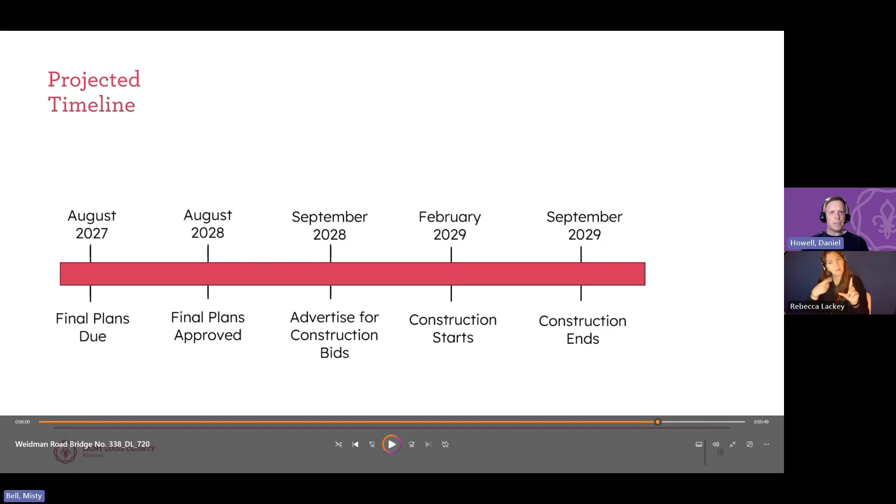We have another comment about Weidman Road being beat to death and turning cars into rattle traps - what is the plan for Weidman Road? I'm sorry if I said Carman earlier, I meant Weidman Road.

I know the bridge reconstruction will address the immediate limits outside of the stream itself. We do take readings countywide for road condition in order to program the roads that are in the worst shape moving forward, so that's something we watch and rate on an annual basis. If it becomes an issue through the detour route, we have local staff in our specific districts who could do some immediate patching, but that's something we watch as well. We certainly account for resurfacing projects as well as bridge replacements.

That road, being an arterial, gets inspected each year. I'm not sure we've done an inspection yet in 2026, but we will keep an eye out for it. We do have an annual program where we apply for funding for project repairs or roadway resurfacing projects, and if it turns out to be a candidate, we'll certainly get it on the list.

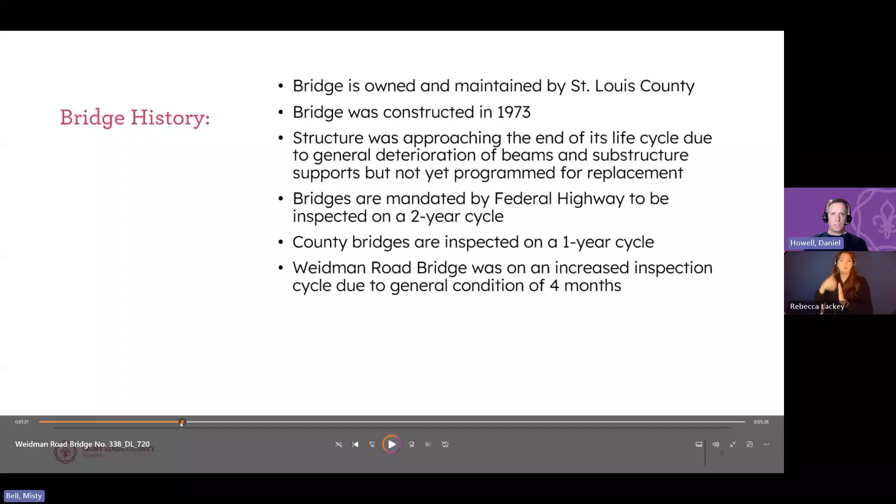How did the condition become critical in such a short time frame? Well, I think, Dan, you mentioned that we inspect bridges typically once a year, but this one started to have issues, didn't it? Yeah, there were some other items, not shown in the couple photos there, that had increased it from the one year to a shorter time frame, but it wasn't yet critical.

It wasn't until we found that critical steel that was exposed in November that required reassessment of the load carrying capacity.

A question about a military-type temporary bridge in parallel to the current bridge — it's such a small span, there has to be a way for a temporary crossing. The issue there would be the right of way and off the stream.

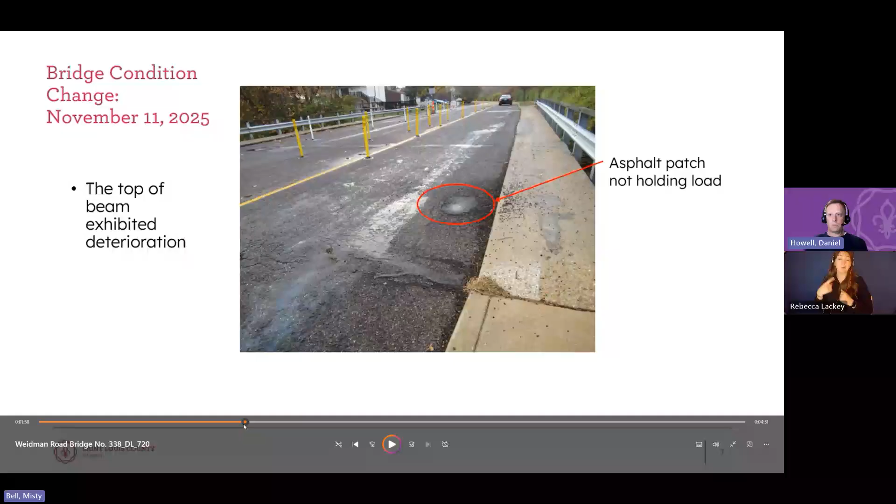If you're either up or downstream, that's somebody else's property. So it would take time to even start that process, and that might take another year and a half, at which point we're almost close to the replacement timeline. Plus, you'd have to pay for the temporary bridge, so that would be added cost to the project.

Next question: if it doesn't take 1.5 years for property rights, is the plan to move up the construction dates? In theory, yeah, we'll try to move as quick as we can through the various phases if there's a way to increase the timeline. We don't want to get anybody's hopes up. We want to try to set realistic expectations — this is our typical timeline for a project of this size. If it happens to be that it gets quicker in one of the phases, sure.

I think everyone on the call and from the county would love to get the bridge replaced sooner than later, so we'll certainly work towards that. Again, no guarantees, but if it's a possibility, that's certainly something we would welcome.

Another question: did this bridge get missed on the 5-year review of bridges? Well, I don't believe so. We inspect our bridges annually.

Do you think this will be a larger project than the bridge? Weidman and the parking lots along it — McDonald's, the vet office — are awful and don't stay repaired long. Is the issue more with Grand Glaize Creek? Is it causing subsidence issues? Does it need to be wider or have more supported banks?

No, in this case, I think it was just the age of the structure, being built in '73. Just based on its condition, it's basically approaching the end of its life, crossing the creek. I don't necessarily think it's an issue with Grand Glaize Creek itself — mainly just the structure itself is in need of replacement.

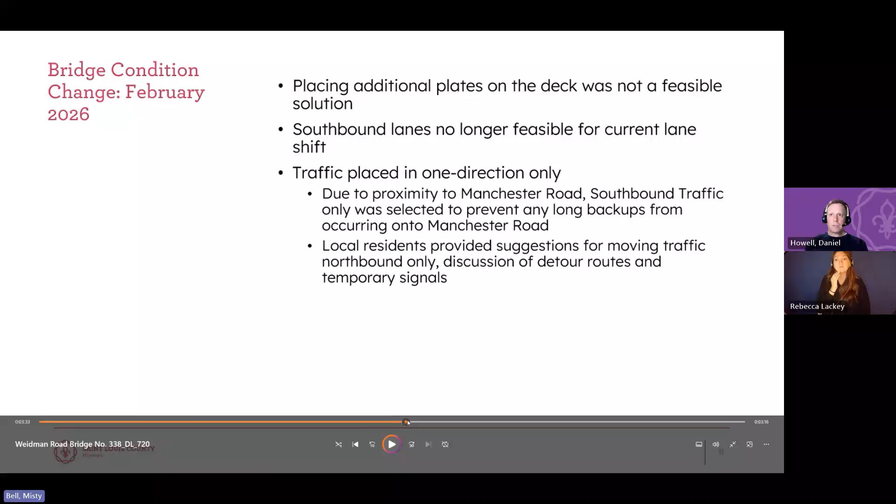As far as extending or expanding the scope of the project, it's really only funded for the bridge work at this point, not an extensive amount of roadway pavement replacement on either side. So for now, it's just the bridge that's funded for construction work.

Next question: while the bridge is closed for replacement, could a signal be added at the Manchester-Dietrich intersection to facilitate traffic to and from Manchester Road? We don't actually own Manchester Road, that would be a MoDOT issue. Chris, from an operations standpoint, there are a lot of obstacles. It would be MoDOT's call whether or not to do it, but there are other challenges like proximity to other signals, the size of Manchester, et cetera, that would make it very unlikely for them to approve or even consider it.

Next question: will the county work with MoDOT and Manchester to assure that temporary traffic flow isn't further hampered during construction? Probably a bit of a moot point, since the bridge will be closed during construction. The traffic flow in the immediate area would be similar to the map shown here, either taking Carman to 141 or to Barrett Station. But we'll work with our agencies in the area to ensure the disruption is as minimal as possible. I know there's going to be a ripple effect once you close a bridge that takes that many cars per day, but we're trying to get it through as quick as we can.

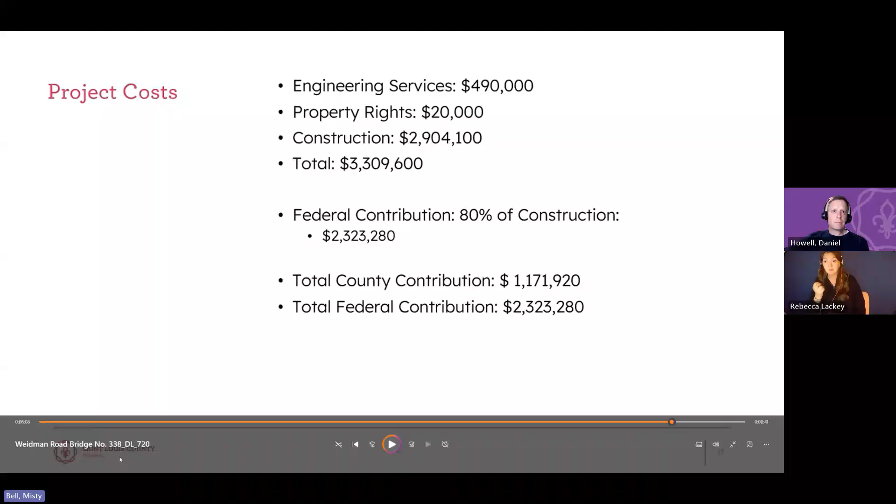Next comment: when Weidman is out, can we ask Manchester Meadows South to let us use their light as a turnaround lane?

Chris, are you familiar with that location? I'm not sure where that's at, not real sure about that one either. But we don't generally use private roads for detours, especially for collector arterial roadways to residential roadways. Without knowing exactly what that is, it's kind of hard to say.

Next question: if the bridge is too unsafe for both lanes to be open, how is it safe for one lane to be open? The bridge is actually wide enough for three lanes. If you've driven through the area, you'll notice it's a pretty big zigzag, Z-shaped motion. So we're taking traffic on the acceptable portions of the span that haven't been affected, as shown in the photos at the start of the presentation.

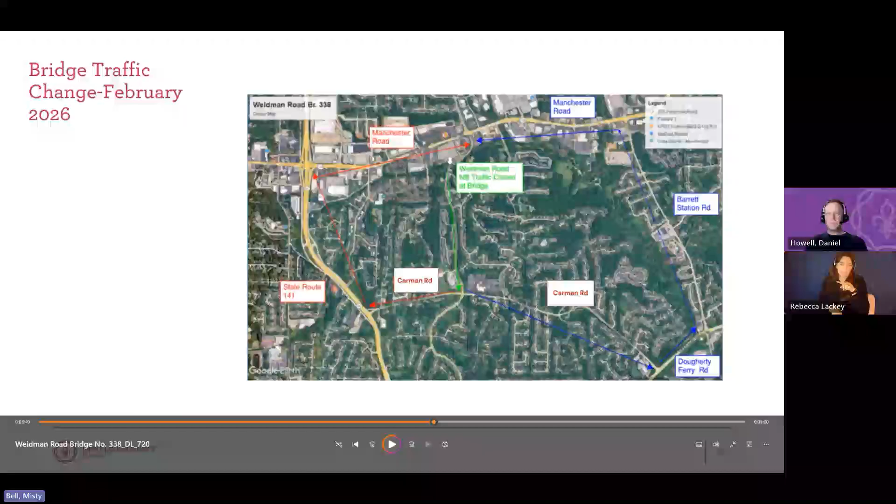Another comment on how quickly the bridge road deck has deteriorated - it's going to have to be repaired virtually monthly. That may be - we're out there patching it on a more frequent basis here.

Another comment - you can turn right onto Manchester from Dietrich and then turn into the DSW parking area, then get the light at the car wash and turn left onto Manchester. It isn't ideal, but safer than trying to cross many lanes of traffic. That's a good point, there are ways around it.

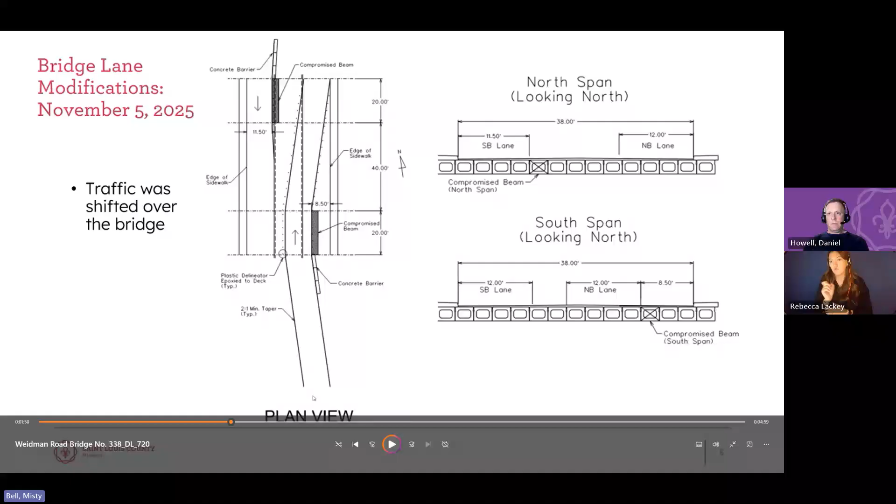Another question - does the county zoning department consider material support prior to approving additional entities such as churches? That's a question for our planning and zoning folks, I suppose. The material support - I guess that's inferring property taxes, which I don't believe is a criteria in planning and zoning, but we can get back to you on that one if you want more information.

Last question - if there was another bridge in the same area that needed major work, would one bridge or another take precedent? Three-plus years is way too long. We kind of take each bridge individually. I don't know that one would take preference over another. From my point of view, it's mainly based on safety. So if there's a safety concern, we're going to program that bridge for replacement. If another one comes up that's similar condition, we'll get that one next. So it's mainly a case by case basis.

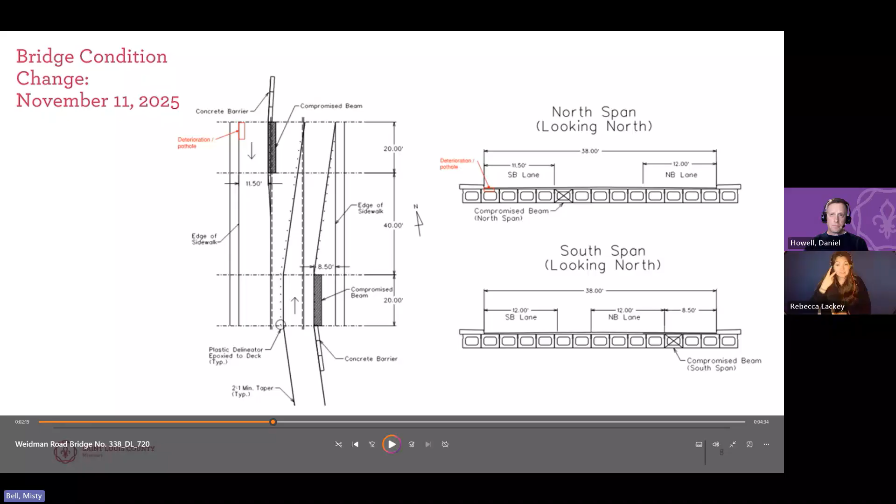Last comment, and I think I'll read this last comment, then Misty, maybe we could watch the slideshow presentation from beginning one more time. It's been a while, and in case others joined us and have not seen it, the last comment is: have we not progressed enough when several beams need work that all the hoopla is to be done and taken? Well, we're working on a design to replace this one. It's a 50-year-old bridge that has reached the end of its time, so not unlike many other bridges.

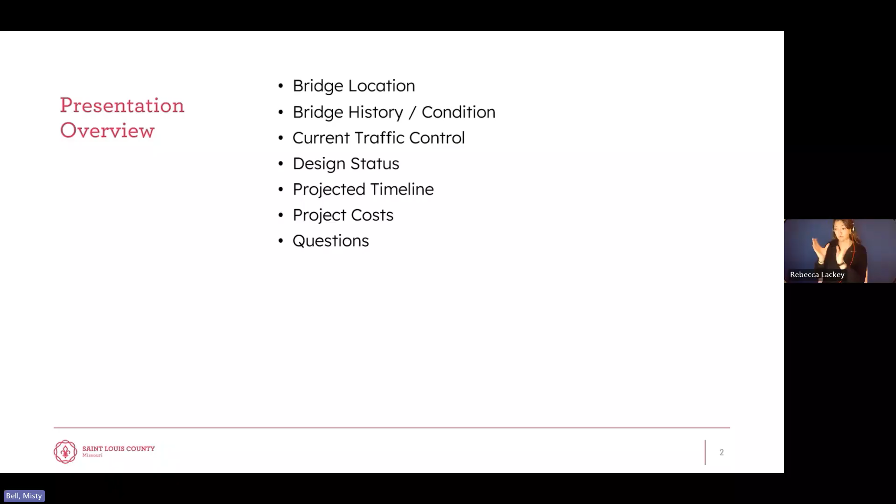Feel free to put those comments and questions in the chat window at any time so we can address them at the end. The Weidman Road Bridge is located in unincorporated St. Louis County, south of Manchester Road between Braeshire Drive and Dietrich Road.

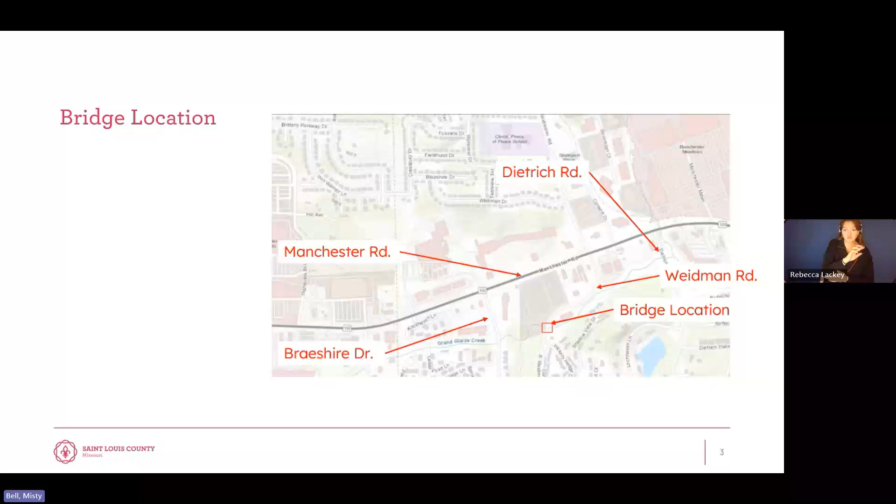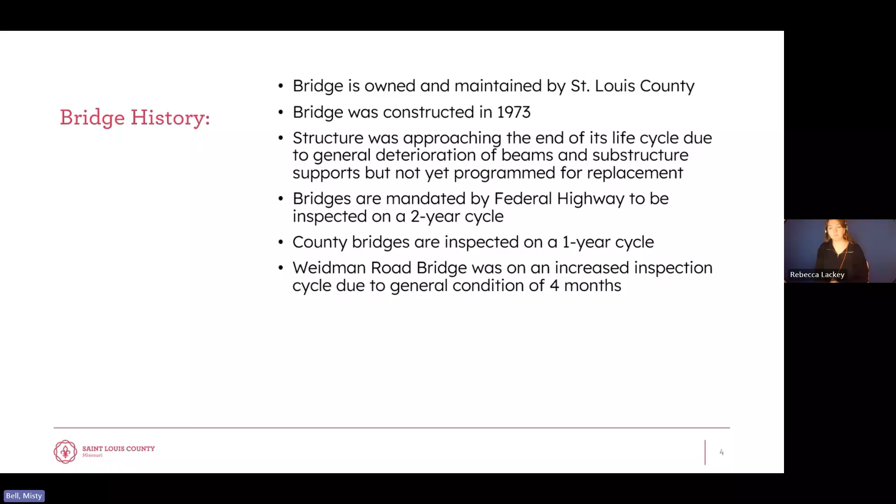The bridge is a three-span structure that was built in 1973. It was approaching the end of its intended design life, but it was not yet programmed for replacement. County bridges are usually inspected on an annual basis, and the Weidman Road Bridge was on an increased inspection cycle of 4 months based on general condition. In November 2025, an inspection cycle indicated exposed steel, which posed a safety hazard. Once discovered, traffic was then shifted to avoid the damaged sections.

The two images here show the location of the compromised beams on the north and the south spans. We'll keep this up for a few seconds so you can get a look at both of these images.

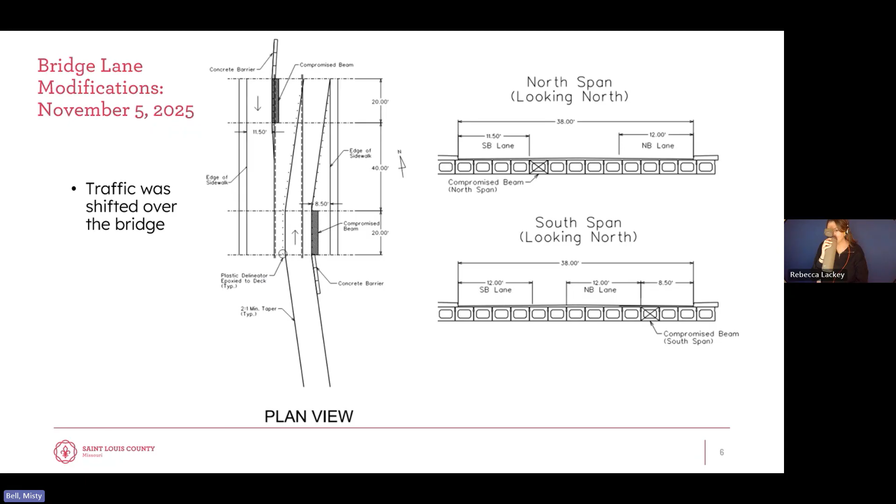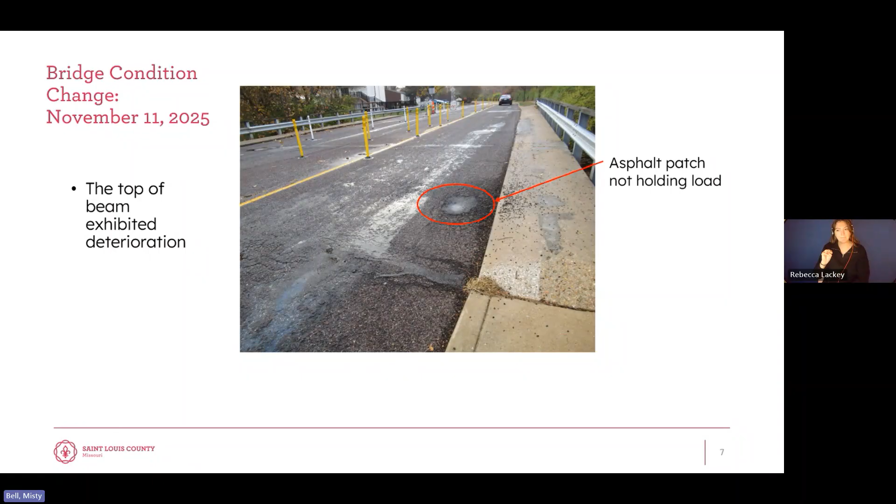Also in early November, county maintenance staff discovered a pothole that required daily patching. Inspectors visited the bridge and determined that the pothole was related to the damage of the concrete beam below. The deterioration was on the top of a voided section in the structure, as shown here in the upper right figure. We'll give you a few moments to view this slide.

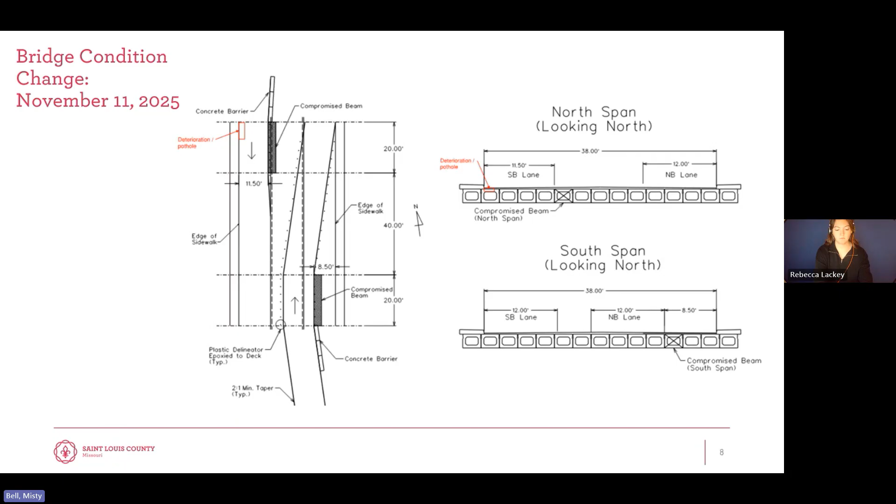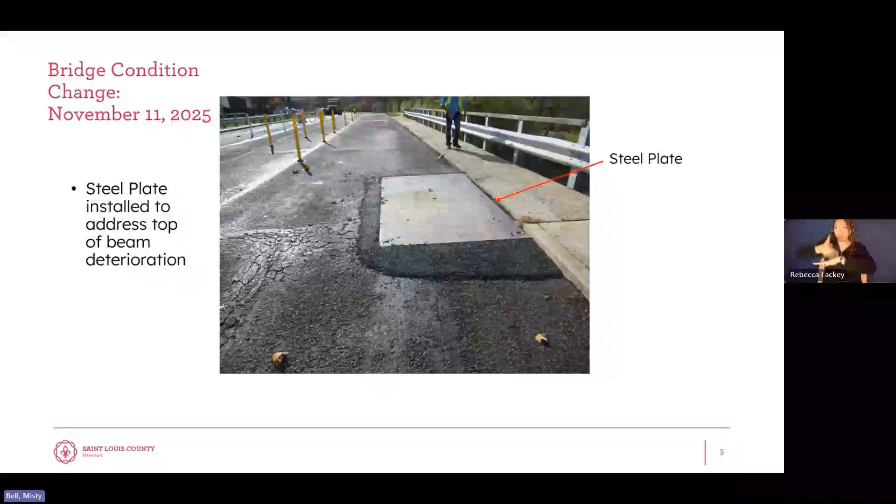Unfortunately, after 3 months of winter storms and snow, more potholes began to form. This image was taken in February 2026. You can see the new potholes just south of the steel plate.

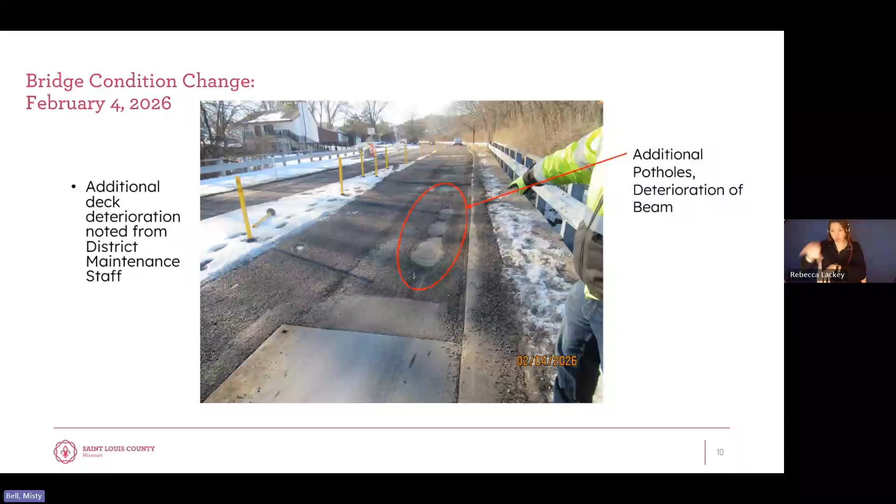Because of the poor condition of the top of the concrete beams on the north span, keeping 2 lanes of traffic on the bridge was not a safe or workable option. St. Louis County chose to shift the bridge to one-way traffic. This decision was also influenced by the close connection to Manchester Road and the high volume of vehicles, more than 10,000 per day. Limiting traffic to one direction helped prevent backups that could interfere with the traffic signal and turn lanes on Manchester Road, which is owned and operated by MoDOT.

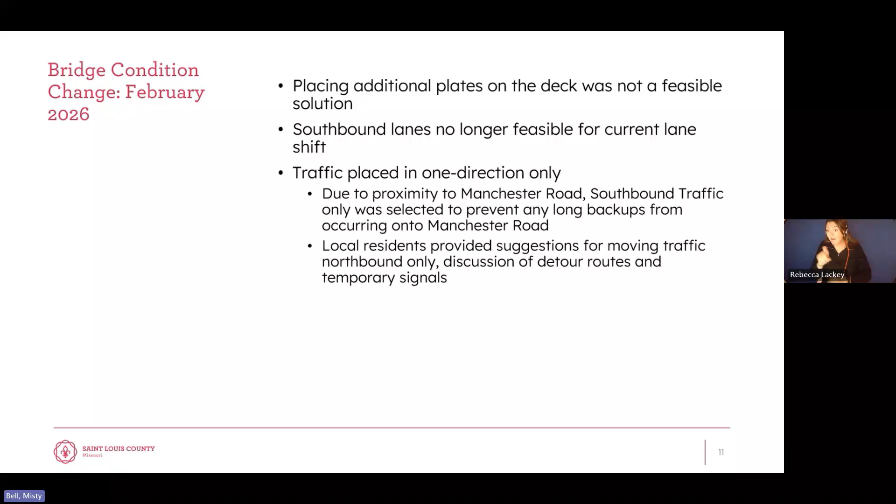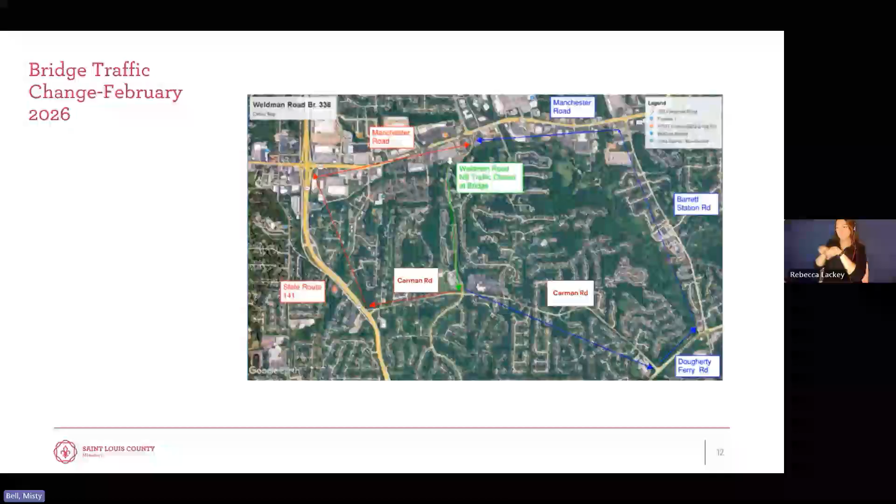After the change was made, several residents called with questions, including why southbound traffic was selected and whether temporary traffic signals could be installed at this location. The county considered this feedback, and then proposed a detour route for the one-way traffic, using Carman Road to the south. Since the county maintains this road, it allowed traffic control and message boards to be deployed more efficiently. Traffic was also modeled to determine if a temporary signal could function at the bridge, taking into account current traffic volume. The results indicated that a temporary signal was possible.

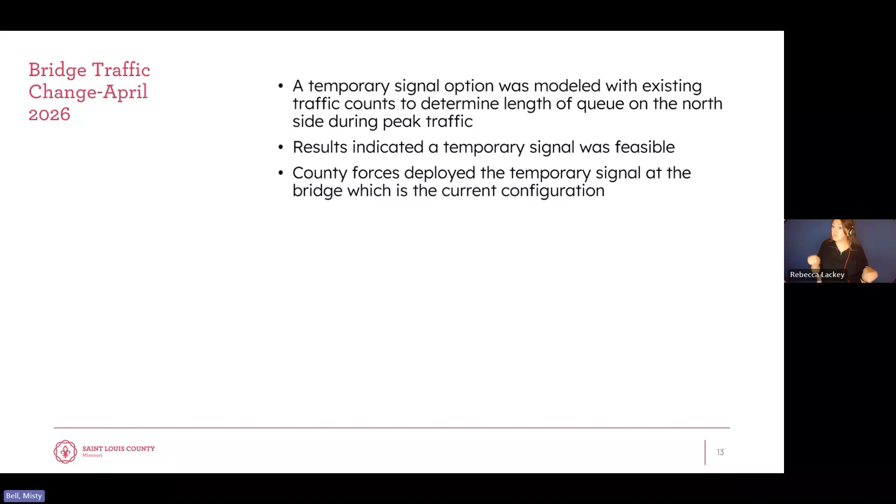The county made this change in early April 2026. In parallel with the traffic changes, over the past winter, county staff have worked diligently to solicit for a consultant to design and replace the structure. This effort started internally after the initial beam deterioration was discovered in November 2025. The county prepared a solicitation for engineering services in December 2025, with the consultant selected by January 2026. The contract for the design work is currently being completed, with the consultant slated to begin work in June 2026.

County staff also submitted a competitive grant application for construction funding. That was in February of 2026. The project was selected for federal funding, and that has resulted in significant savings for county residents.

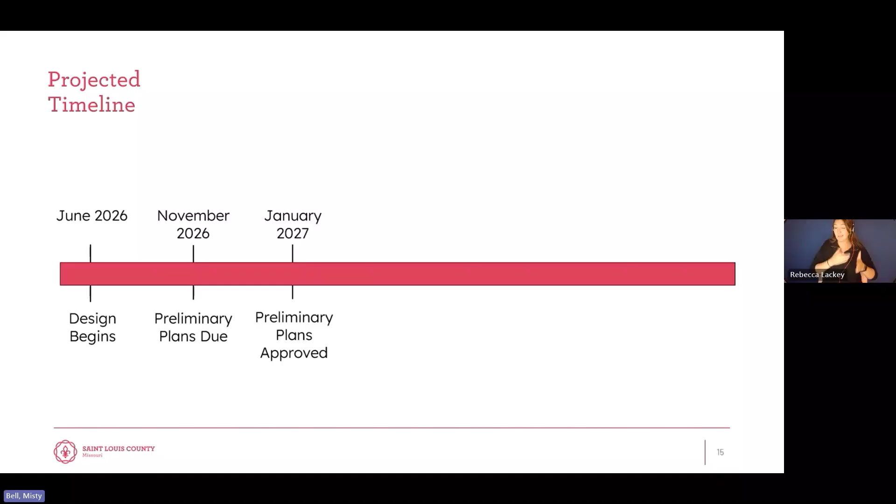The projected timeline for the bridge replacement is shown here, starting in June 2026, with preliminary plans being completed by the end of the current year. Plans for property rights acquisition will then continue through July 2028. Historically, property rights acquisition is the larger portion of the project timeline.

Final construction plan approval is tied to property rights acquisition completion. In other words, the project cannot move to the construction phase until all easements and property rights for the project have been obtained. Construction is estimated to start in February 2029, with completion later that year.